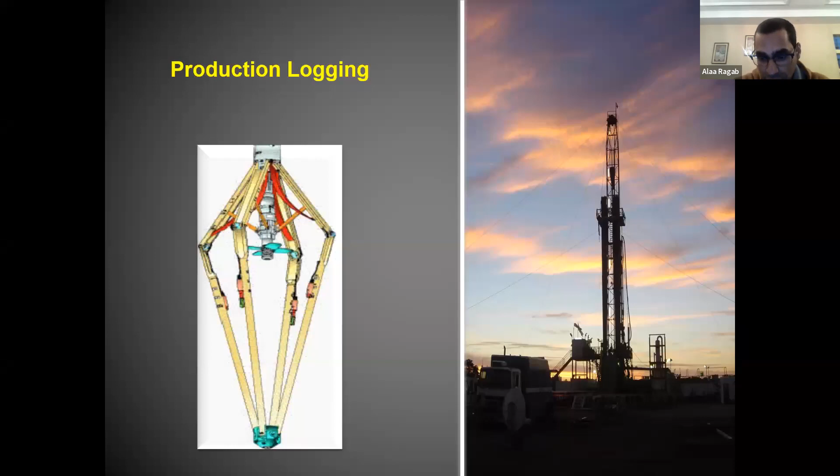Starting with production logging - we'll talk about the definition and usage, then the applications of production logging as a whole. Then we will focus on the PLT, or the production logging tool. Firstly, for the definition and usage.

If we're talking about production logging, it's a log that will be run in the well once it's completed, whether producer or injector. This is the traditional meaning of production logging. Now this meaning is expanded to include all logs that have impact on production, even during the drilling or completion of the well.

For example, the cementing evaluation log, the CBL or cement bond log - you will run this log during the completion of the well. In some cases, if you have the surface section, you can run this during drilling. But the cement itself has an impact on production, so we call this a production log. As you know, if you have a problem in the cementing behind the casing, you will face problems in production - maybe you will lose your well entirely if you have a cement problem.

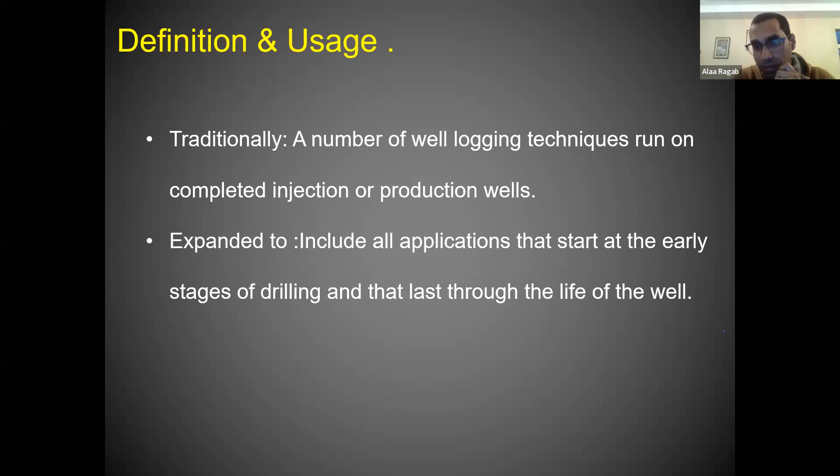As usual, we didn't run any logs until we have a problem. Once you have a problem in the well, you search about what kind of log will be run to solve this problem. I think it's normal for all companies to do this.

But with the advanced stages in production, like secondary and tertiary recovery, you are in bad need of these logs for monitoring the distribution, especially in the secondary stage for water flooding. If you are working with water flooding, it is essential to run the production logging tool to see the vertical distribution of fluids in your injector, to closely monitor the project and the sweep efficiency.

Also, if you have modeling like Eclipse or simulation modeling, you should have a match between the actual distribution of these fluids and the model results. So from where will you get this actual vertical distribution? It is only from the PLT tools.

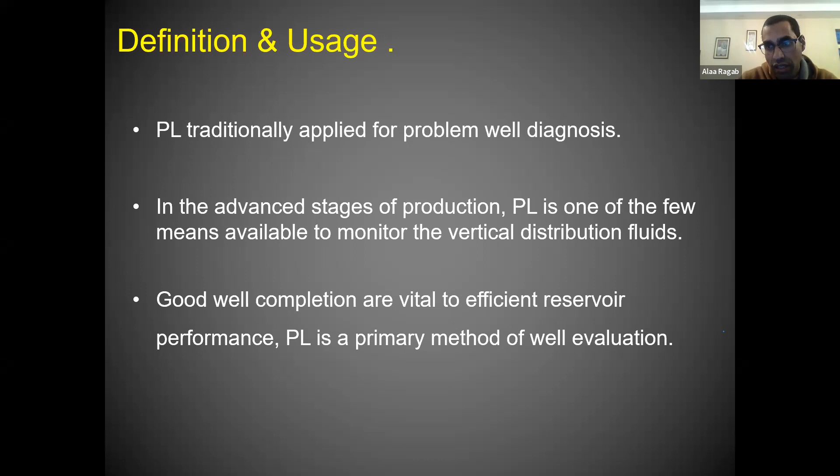If we move to the applications of production logging, as we said, production logging covers the early life of the well, starting from drilling to the end life of the well. So we classify the applications as during drilling and completion, for reservoir performance monitoring, and for the planning and evaluation of workover.

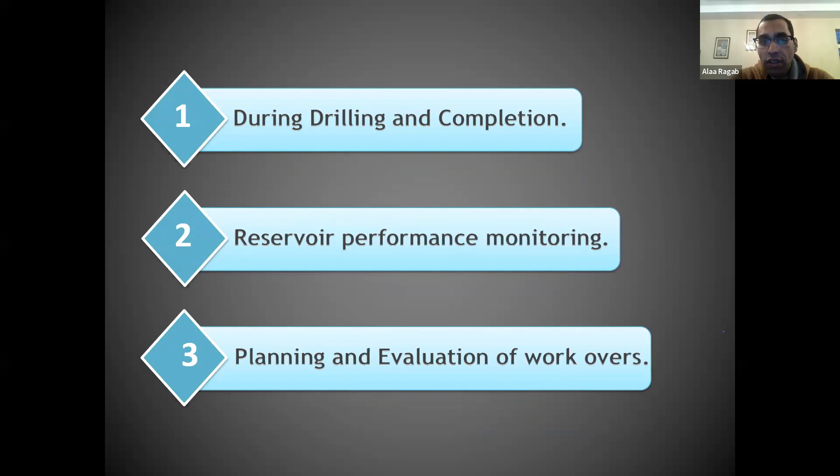For drilling and completion, one application is to locate the lost circulation zone. This happens during drilling: if you have a high pressure zone versus a low pressure or low pressure permeable zone, that zone will accept drilling fluid during drilling. We call this a lost circulation zone, as you lose your drilling fluid in this zone during drilling. An application of production logging is to locate which zone has this lost circulation.

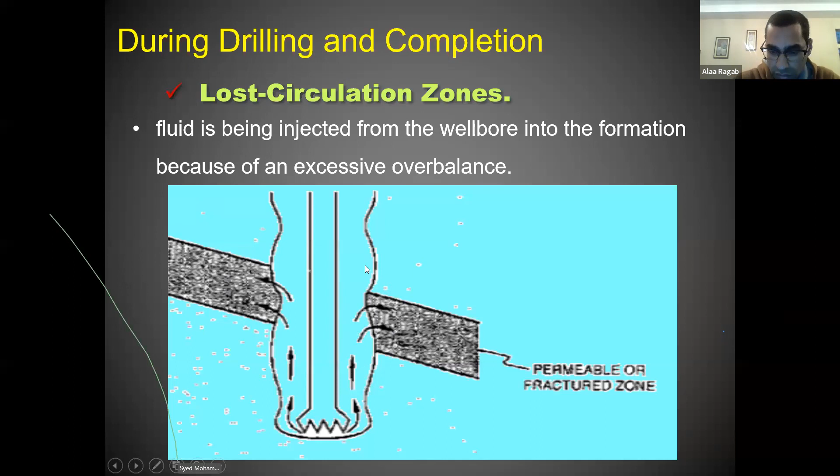In the opposite case, the well kick or blowout: if you have a zone with higher pressure, it will flow to the surface during drilling. We call it a kick or blowout. This application of production logging is also to locate this zone, or the source of the blowout.

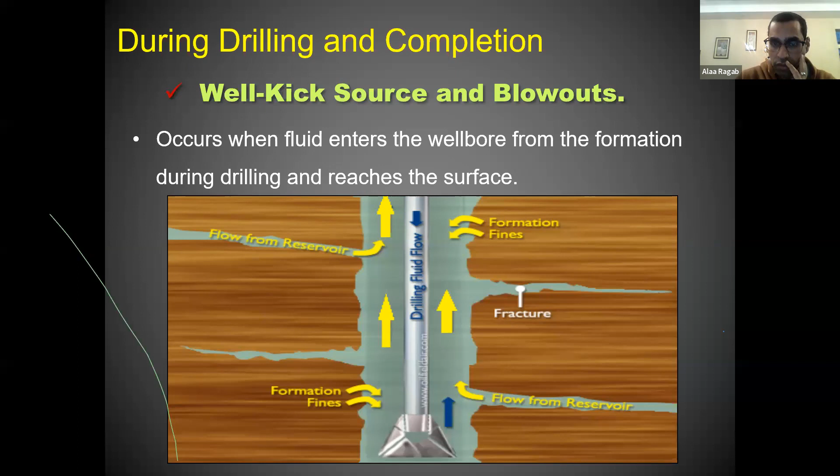Also for the top of cement, we're not talking about the evaluation here, that's another application, which is to evaluate the cement behind the casing. This application is just to know the top of cement behind the casing. If you did the cementing job and the company man on the rig already calculated the volume of cement to be pumped behind the casing, but maybe you have losses, or a zone behind the casing that can accept cement, so this design or volume of cement may not be sufficient to cover all the volume behind the casing. How can we know where the top of cement is behind the casing? This is also an application of production logging, to locate the top of cement behind the casing.

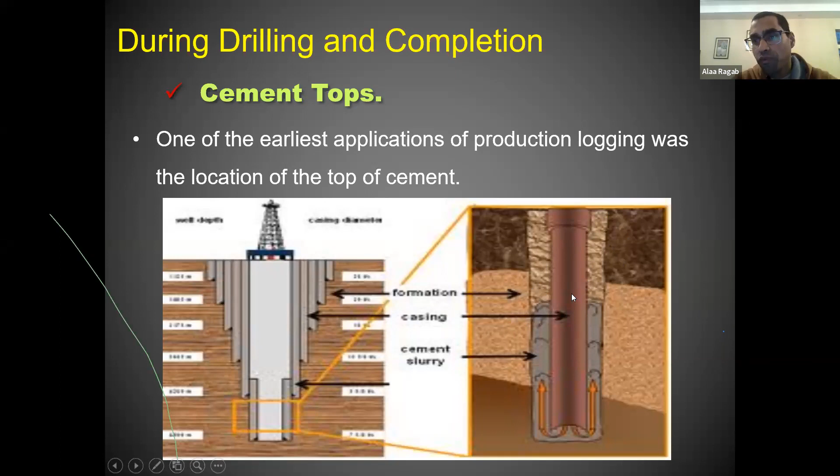This is the other application for cement: the cement quality itself. If you did the cementing job, you need to evaluate the cement, or the bonding between the casing and the cement, and between the cement and the formation behind the casing, because poor cement behind the casing will cause a lot of problems. In some cases you will lose the well entirely due to bad cement behind the casing. So this application, or means to evaluate the cement behind the casing, is to run the production logging, and we know the cement bond log or the VDL for this application.

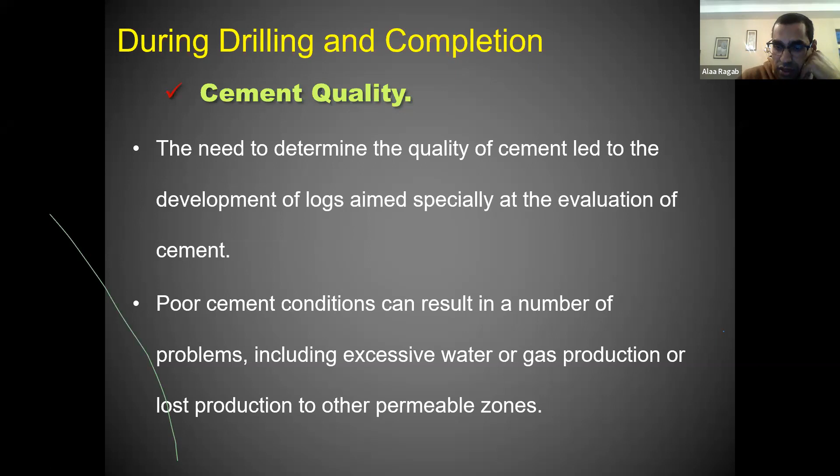Another application is to evaluate the gravel pack quality. In some cases you will run or place a gravel pack behind the casing to prevent sand production. This is normal in some cases, to place this gravel pack behind the casing to prevent sand production. The placement of this gravel pack is essential for its effectiveness. If you have a problem in the placement of this gravel pack, it will be useless for preventing sand production.

How do we know, how do we evaluate the placement of this gravel pack, or the form of this placement? It will be done also with the production log.

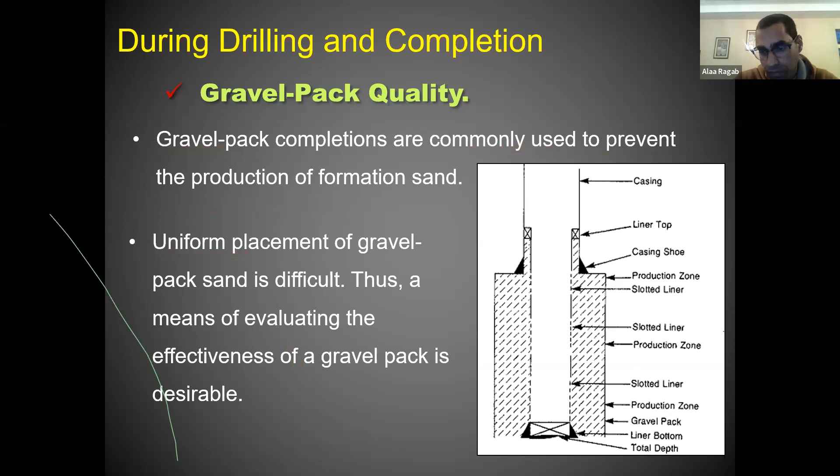This is a good application, the perforation location or perforation performance. We know that the perforation is the path between the formation and the well bore, providing fluid from the formation to the well bore. Without perforation, we will not produce.

I think no one thought about this: if we perforate in the wrong location. Maybe no one faced this problem before. After perforation, when you put the well on production, no production. But if you look at the log, yes, this is a good well. Based on the logging data, based on the pressure, this is a good well. I should have very good production from this well. But after perforation and putting the well on production, no production.

Where is the problem? I think no one thinks about that. We perforate in the wrong location. I know you did the perforation in an efficient way - you run in hole with the perforation tool and do correlation, the gamma ray correlation, before the perforation. Before you perforate, you should have a match or correlation for the gamma ray between the open hole gamma ray and cased hole gamma ray. But maybe in some cases you have a mismatch, or misleading correlation, and you will perforate in the wrong location.

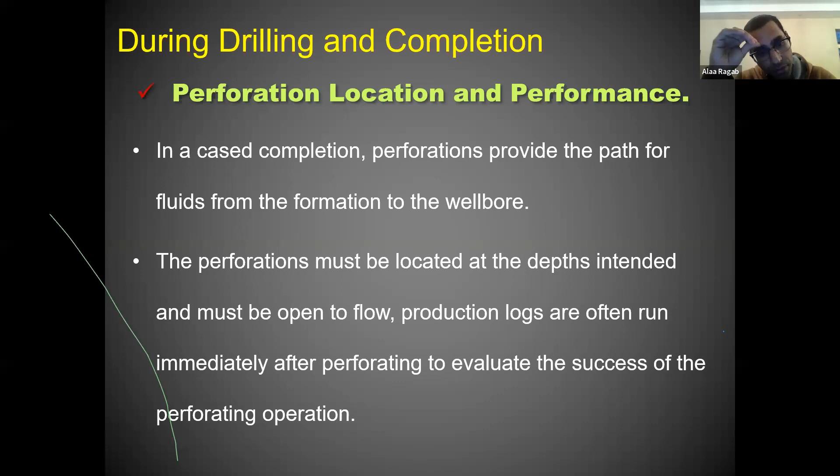Also, the well treatment evaluation. In some wells or in some companies, this treatment will be vital or critical for production. For our company, for example, hydraulic fracture is essential for production, and this is the most expensive part of well completion. So to evaluate this treatment or hydraulic fracture, it is also an application of production logging.

The evaluation here, maybe you will not change or make a treatment. If you have a problem with this treatment, maybe you will not make a remedy work for this well, but it will be effective for the next wells - you may change your design of the treatment for next wells. So how to evaluate this treatment? It is an application of production logging, and when we're talking about hydraulic fracture or acid stimulation jobs, you will evaluate the region or the height in the formation that is affected by this hydraulic fracture or acid treatment.

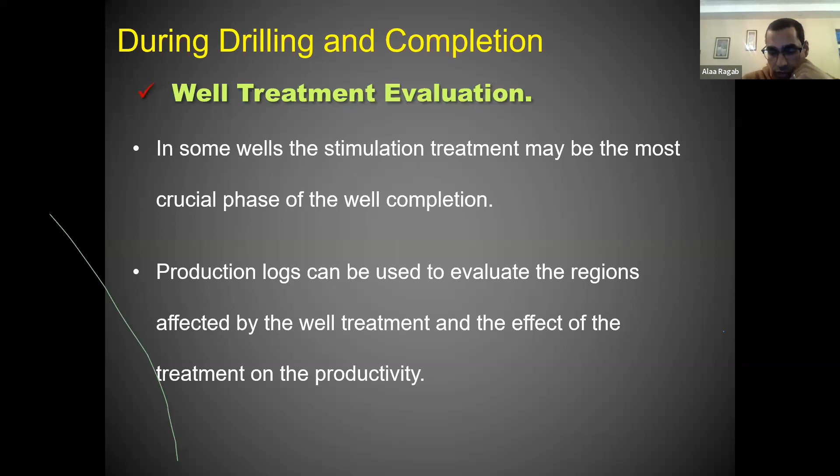The other application is reservoir performance. The first and main use is the measurement of the flow profile. This is the main application for the PLT tool in the well, to get the flow profile - the flow rate versus depth. Just to get the flow rate versus depth, we call it the flow profile, and this is the main purpose for the PLT, especially in injector wells. When you have single phase, you run it just to get the flow rate versus depth.

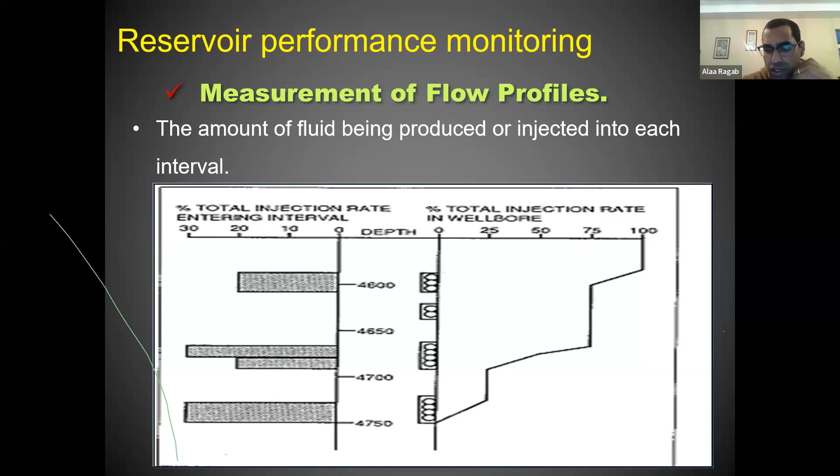Another application is, to evaluate producers, you need to differentiate between the types of fluids. So you will get, versus depth, the rate of each phase. If you have multi-phase, you will get the rate for each phase, so you can determine the interval of isolation - which zone is the source of water and needs to be isolated.

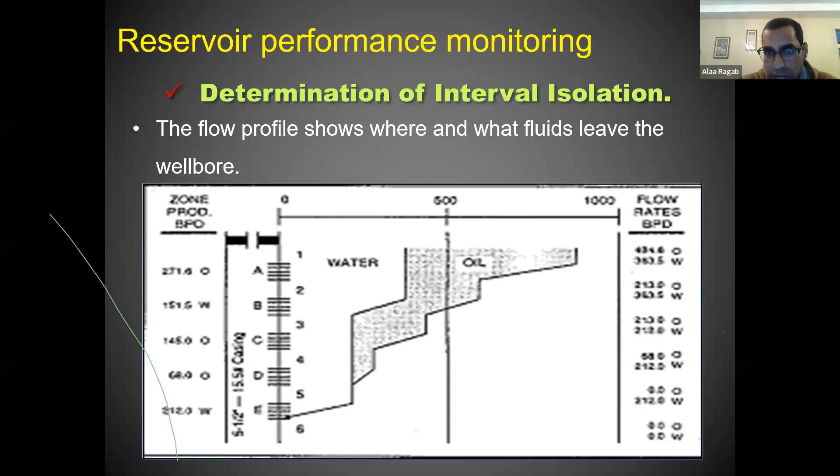Also, the reason for abnormal rate change. Maybe in your well, suddenly you will have a higher increase in water cut and water production with a sudden decrease in wellhead pressure, or if you have a producer, we will have an increase in both water cut and wellhead pressure. So this is an indication of another source or another zone sharing in your well. To know what is the source of this higher water cut or high increase in rate, we will run the tool to evaluate the source for this higher water cut.

Also, if you have gas, maybe you have an increase in the gas-oil ratio also. Also for injectors, in some cases you may have a sudden increase in injection rate and decrease in wellhead injection pressure, which means another zone is open for injection, or you may have fractures or breakthrough in some zones that accepted more water due to breakthrough. So how to detect these zones or detect the source is an application of production logging.

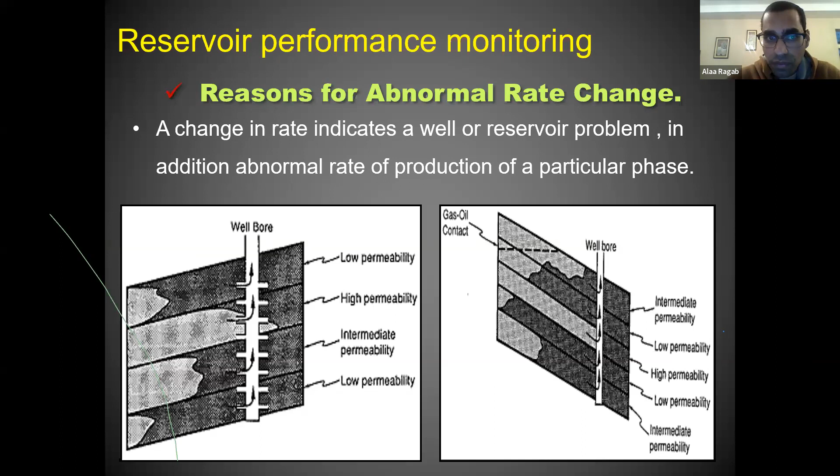Another application for production logging is coning. How to detect the depth of coning? If you have water coning like this, how do you know the depth that the cone reaches?

This is also an application of production logging. We have tools that get the depth the cone reaches inside the well bore. If we're talking about the PLT tool, it just gets inside the well bore, but we also have tools that can get behind the casing to see the saturation behind the casing. Also for gas, you can detect the depth of gas coning.

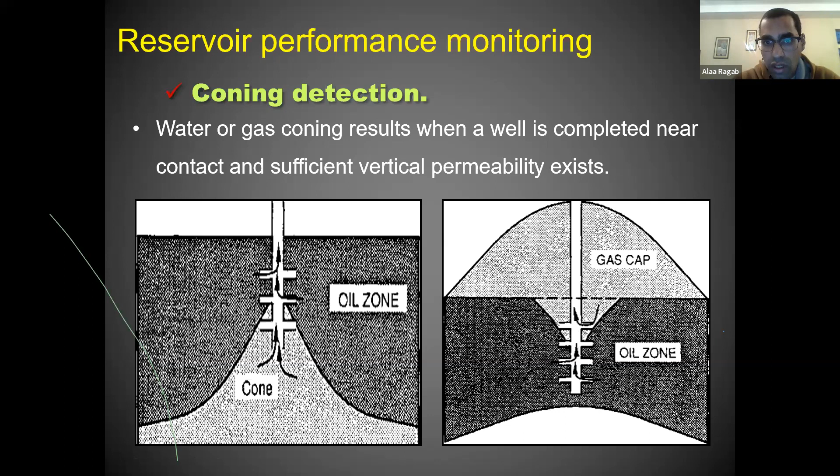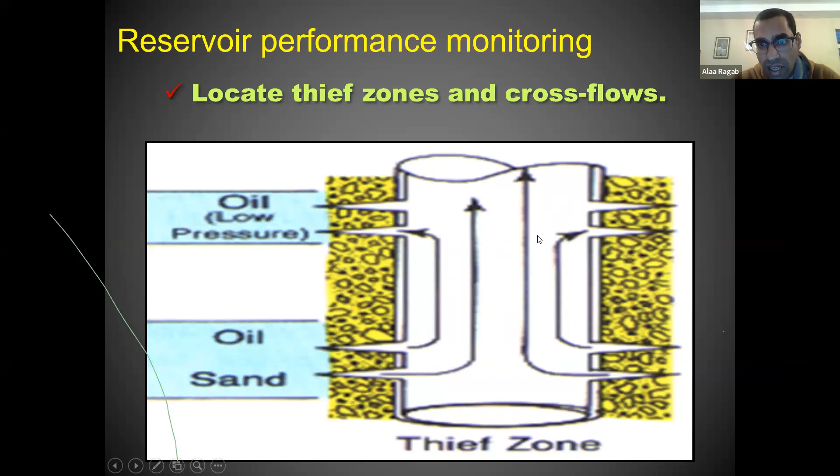Also, if you have a thief zone, or what we call cross flow, you will lose production due to this. You have downhole cross flow like this from a higher pressure zone to another lower pressure zone with high permeability, and you will see cross flow like this and lose production due to it. So how to locate this thief zone, or how to know if I have cross flow or not? It is one of the applications of production logging.

For the planning and evaluation of workovers, this applies especially to mechanical problems, like bad cement behind the casing creating a channel behind the casing, or a hole in the tubing or casing causing loss in production like this, or production from an upper zone, maybe gas, maybe water, due to mechanical problems.

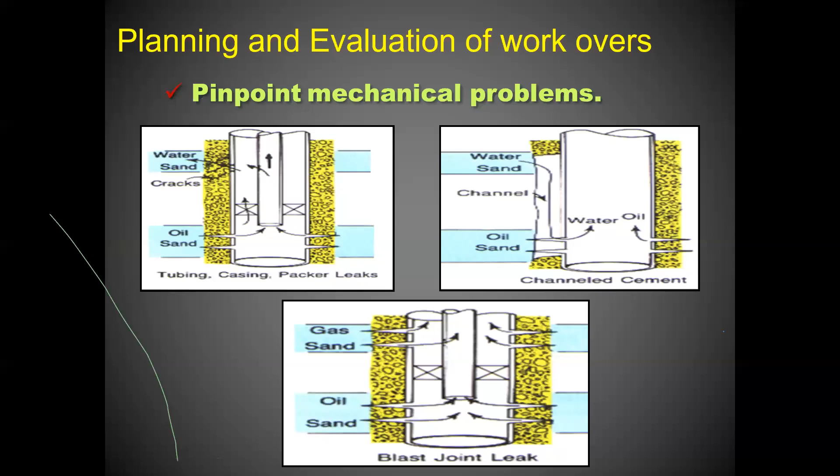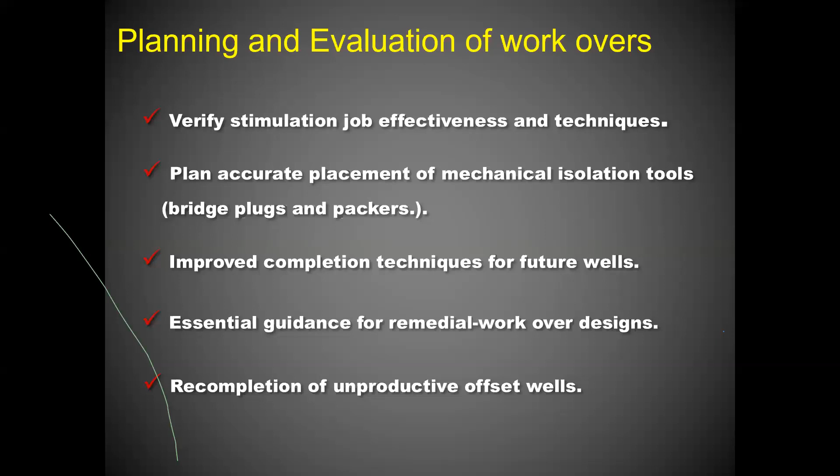How do you locate these problems or identify them? It is using the production log. So at the end, you will use production logging to verify the stimulation effectiveness and technique, and in some cases we will change the stimulation technique based on the results of production logging.

As you know, there are many techniques for hydraulic fracturing. You may use a technique in this well, and after production and evaluation, you will see that this technique is not efficient or not suitable for this well or this field. So we can change or redesign the technique for a better result.

Also, it is essential, as we said, if we have a mechanical problem, to know the depth of this mechanical problem for bridge plug placement or packer placement. So we locate the depth of the mechanical problem for isolation.

Also, to improve the completion, as we said, maybe not for the current well but for future wells, you can redesign or make changes in the design for future wells. It is also an essential guide for remedial workover designs and for the recompletion of unproductive offset wells.

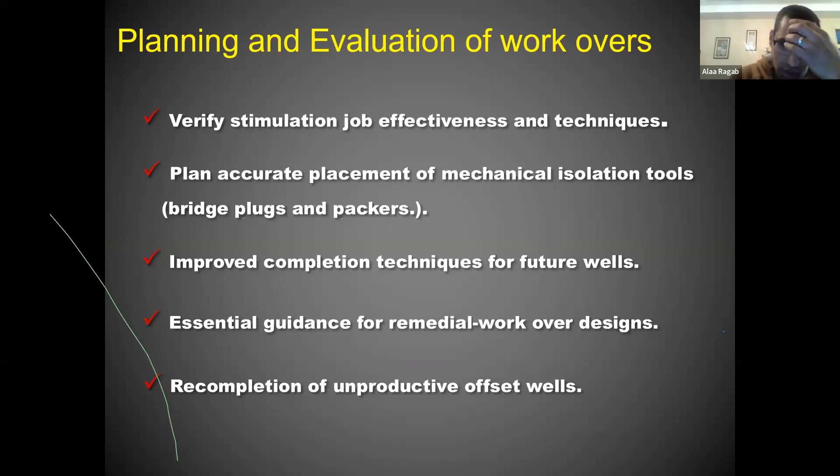This is for the application, especially not for the PLT tool, but for all the production logs, which we can classify into groups. You can have cement evaluation logs like CBL, VDL, the ultrasonic logs for cement evaluation. We call it the cement eval logs.

You may have a temperature log or temperature survey. In some cases, we can run only with the temperature tool as a log, and it will be useful and will answer your question for this well only with the temperature log. So we have a temperature log or temperature survey only. We have also the radioactive tracer log.

This is like the PLT tool. We have the noise log, or especially now the spectral noise log. Also, we have the group of corrosion measurement logs, or the integrity logs for the casing and the tubing, like the multi-fingering, like the electromagnetic tools.

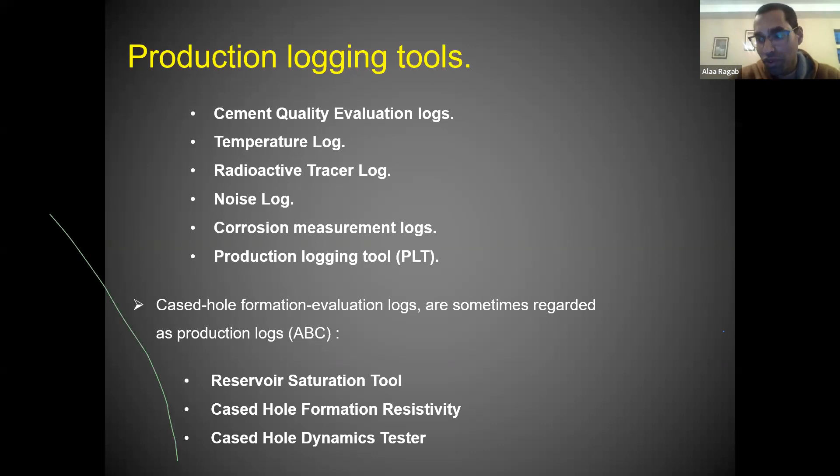And we can also check the noise log, correct? If we want to see behind the casing, that can also detect very low rates. The noise log, I think with low rate, will not be effective, because the noise log needs a higher rate to detect the flow behind the casing. It's based on noise, so it needs a higher rate to have noise detected behind the casing. So if you have a smaller rate, I think it will not be effective to use the noise log.

Okay, alright. Thanks a lot. Thanks a lot.

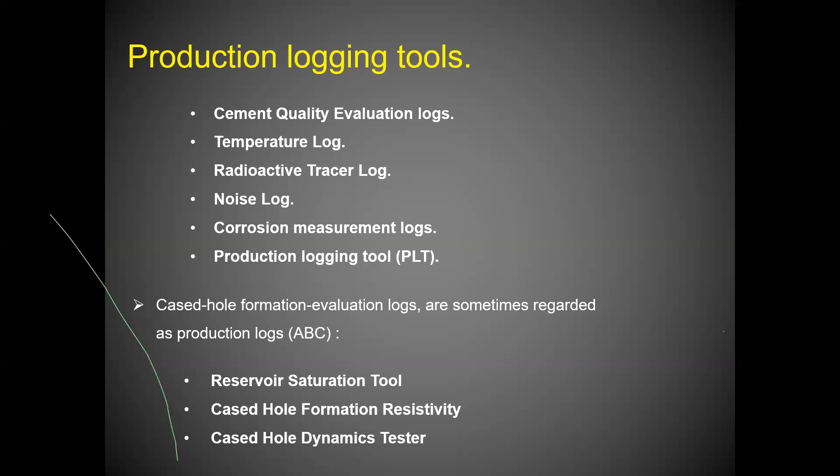Okay, so no more questions in general, and I would like to thank you for this interesting session about PLT and its theory and application. Thank you again.

If you have just five minutes, I need to emphasize a point here. Even after this discussion, you need to know what the application is, and besides this, you need to know the limitation of each tool, because in some cases you may run the wrong tool, or the tool will be useless for you. You will waste time, waste money, and this tool will be useless for you.

Because of the condition of your well or your case, this tool may not be suitable. So it is essential to know the application and limitation of each tool, and based on this you will select the suitable tool for your case. Without this, you may lose money, lose time, with nothing to be done.

So as we said, the first thing for your survey is the planning. The first is planning to determine your objective firstly. What is the objective of running this tool? Based on your objective, it will be a guide for the selection of the logging tool. So based on your objective, you can select the suitable tool. It's very, very important to know the application and limitation of the tools.

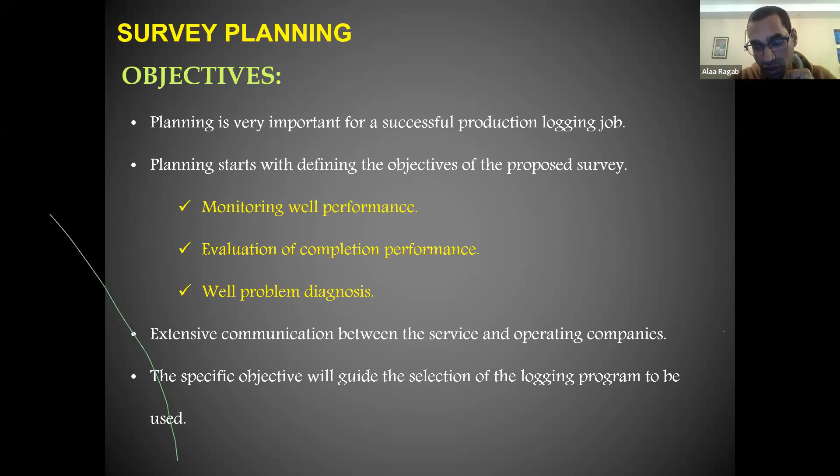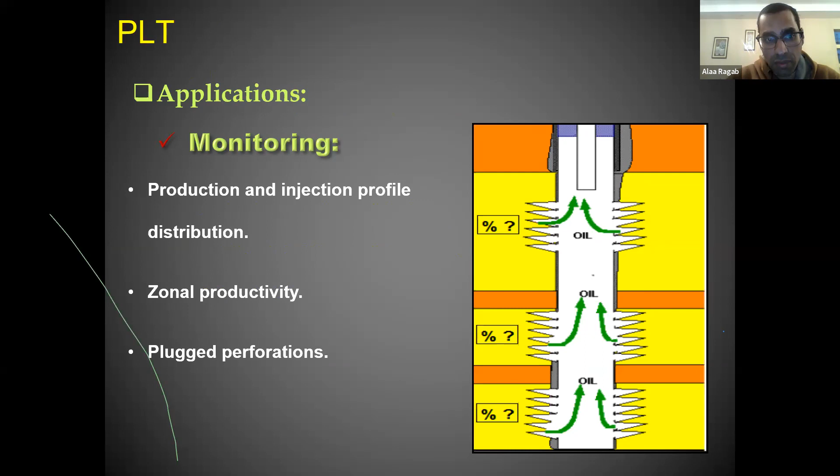Okay, thank you. Thanks. This is just a focus on the PLT as a production logging tool, which will be the main subject of the course, probably for monitoring and evaluation, as we said before.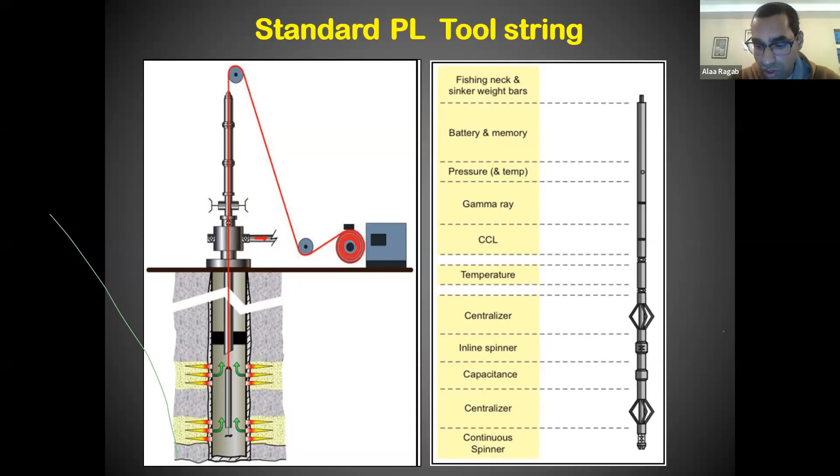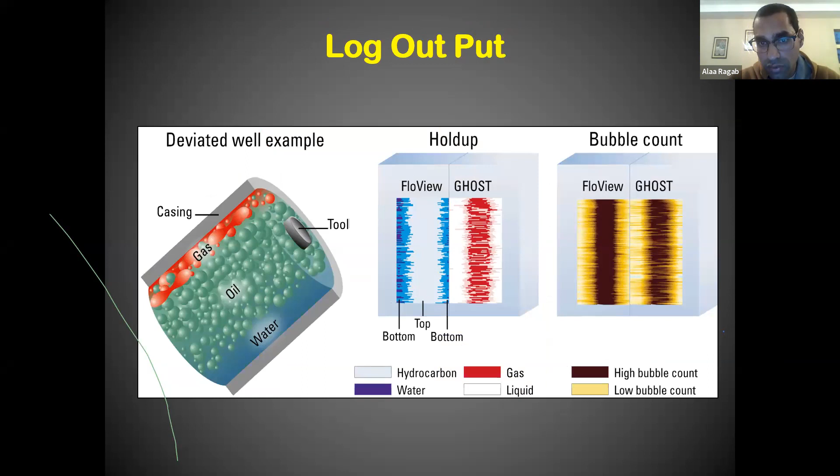I need also to show this standard string for the PLT, and this is the tool in the standard string. It just runs with the gamma ray, CCL, pressure, temperature, and the spinner, and also the tools for multi-phase, if you need to differentiate between oil, water, and gas. You will end up with something like this as a tool view, and something also like this.

And here I need to make a point about something. The production logging tools, it is like well testing. I think when we run well testing, you just get...

This is a question for you: what data will we get from the well test? The data we collect from the well test — you can answer in the Zoom chat. Okay: surface rates, formation pressures.

Skin factor. Average permeability. Hello, hello. Yes, sir. Yes, sir.

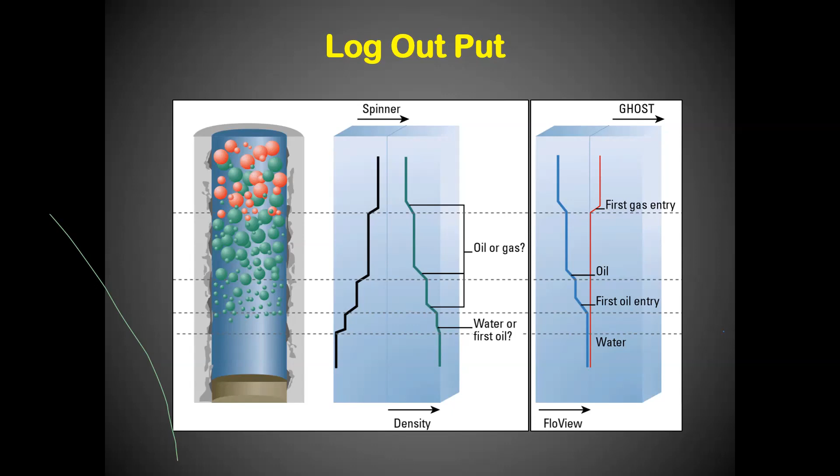All of this data can be gotten after interpretation. The only data that we collect from the job is the pressure versus time from the gauges with temperature. We also have a temperature gauge and a fixed rate on the surface. So we just collect pressure and temperature versus time at a constant rate. This is exactly what we collect from the well test.

But this is not the purpose of the well test. We don't run the well test just to get pressure and temperature. We run it to get the skin factor, the average permeability, the reservoir pressure, and in some cases the distance to the aquifer or the volume of the reservoir. All of this data is obtained only after interpretation. Before interpretation, you will have nothing.

Just pressure and temperature versus time. This is also true in the production log. Without interpretation, you will get nothing. It's just data gotten from the tool. With it, what can I do?

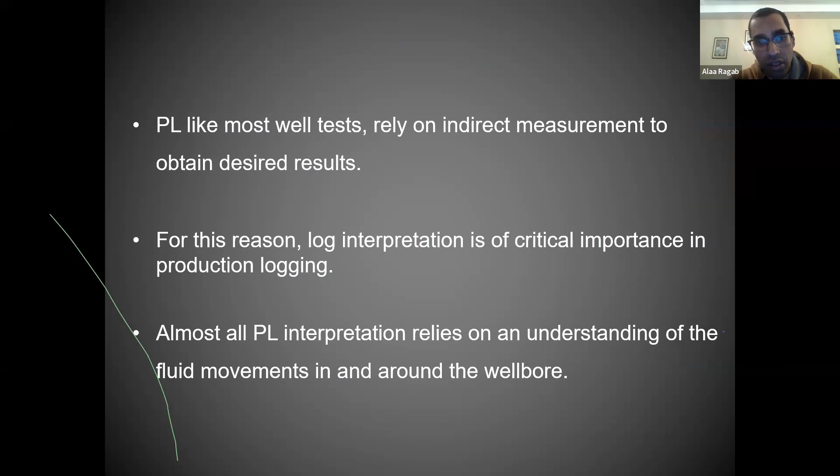So this is with interpretation to get the results - after interpretation you get these results. And when we're talking about interpretation, we're talking about the role of the engineer. Here we have the importance of an engineer doing this interpretation - it's not like being a software user. I need interpretation to understand, I need an engineer to understand what he will do, how he will do this interpretation.

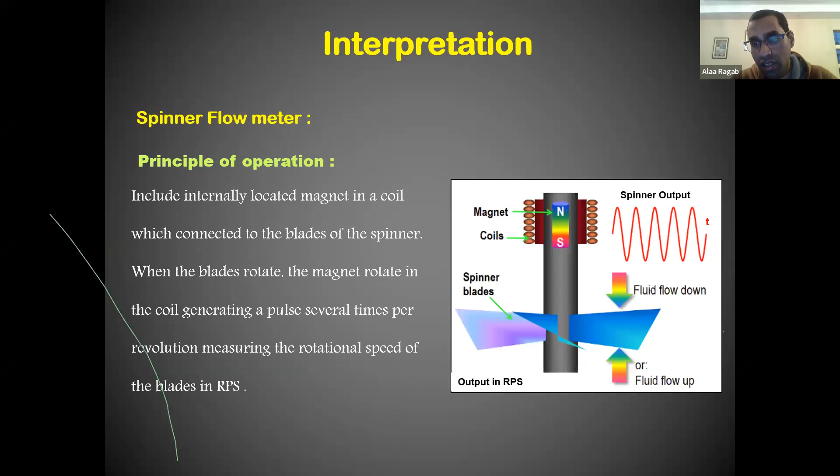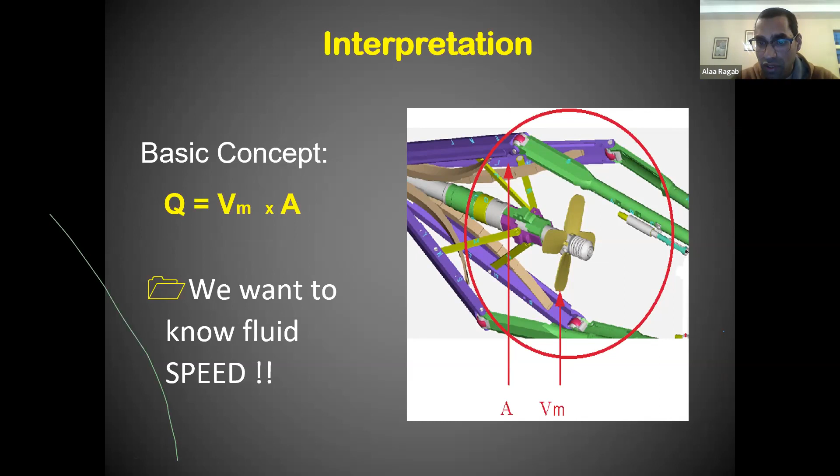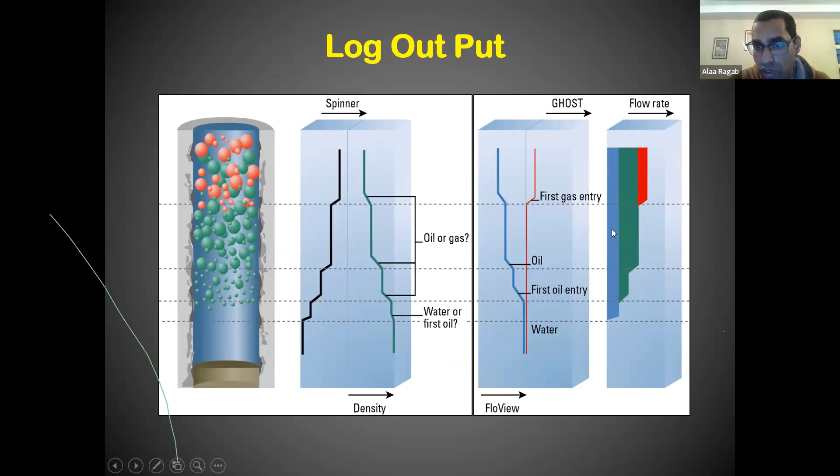So after interpretation, using the spinner data with RPS that you get from the tool, for the velocities, it's a concept for the interpretation that velocity multiplies the area. The area I can get easily from the caliper, but what about the fluid velocity? How can I get the fluid velocity from the RPS, how can I convert the RPS to fluid velocity? This is the role of interpretation in the PLT, to get a track of flow rate. As you see here, you have flow rate for every phase - water, oil, and gas.